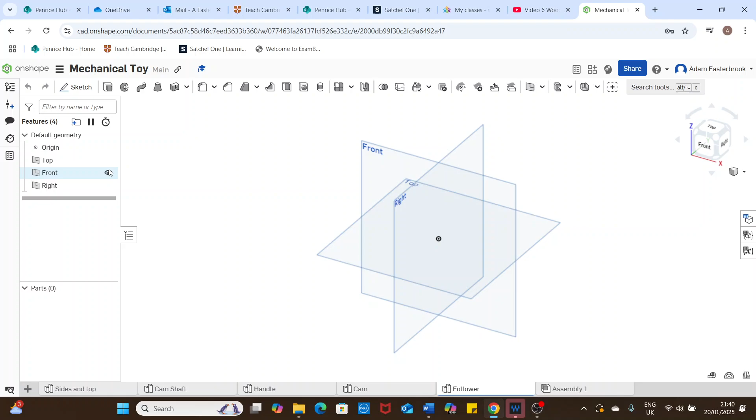Click off the tab. Okay, this is going to take seconds to do, it's not a difficult thing to do. So again, I'm going to hide the top plane, hide the front plane. We want to sketch on the right plane.

So use my viewing cube, click on the right. Sketch, I want to choose the right plane. So from my 3 options, I'm going to left click on right. All my toolbar comes alive, my lines, my circles, shapes, everything.

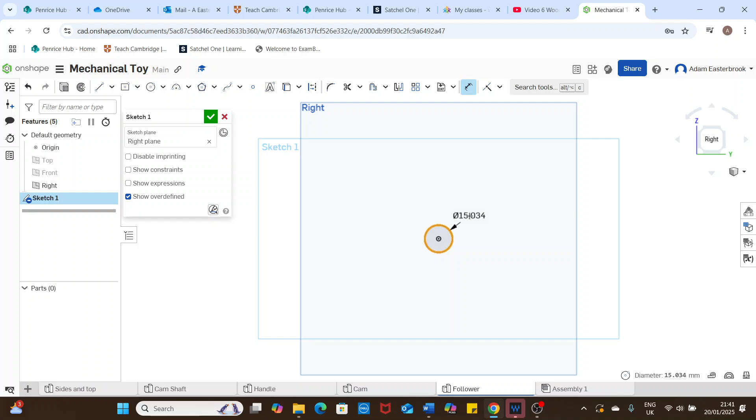I'm going to choose my center point circle. I'm going to snap it to the origin because why not? I'm going to go up and out and we're going to change the diameter of that circle to 6 mil.

That's meter. That's not right, let's see if I can delete that. 6 millimeters. There we go, green tick.

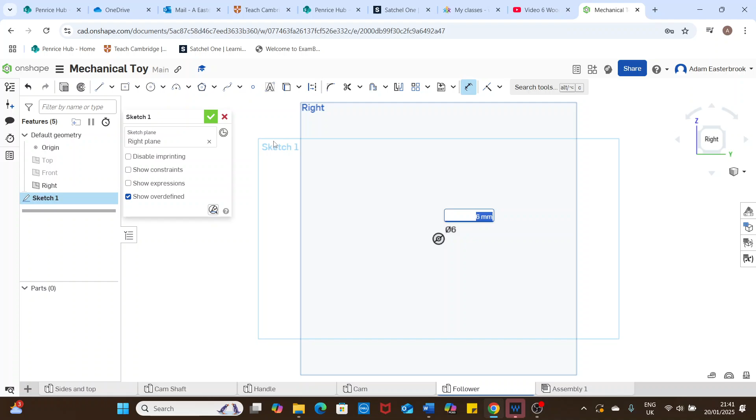Because we set the workspace unit to millimeters, whenever I type in a dimension, so that's I changed it to 10, I don't need to put the units in, I don't need to put the millimeters in because it's defaulting to that.

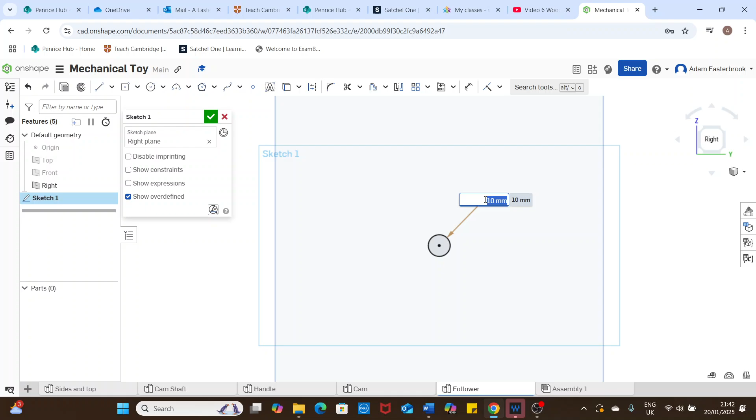That's why it's really important to check those workspace units at the start of any design that you create on Onshape. So let's double click on my 10 and change that back to 6. Don't have to put in millimeters, does it for me.

Okay, yeah, you've guessed it, we need to make that into a 3D shape. So I'm going to right click. You can see I'm hovering so that the circle goes orange around the outside. Be careful you don't click on the center, it's got to be on the actual shape.

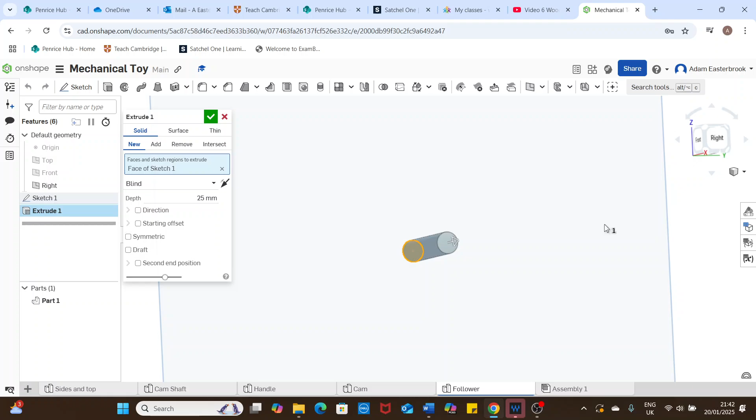Right click, extrude, and this is going to have an extrude depth of, let's go with 150. We can change that later if we need to.

Again, I'm going to choose symmetric, just so half of it extrudes back, half extrudes forwards, and then I'm going to green tick it. And I'm going to change the appearance to make it look a little bit more like

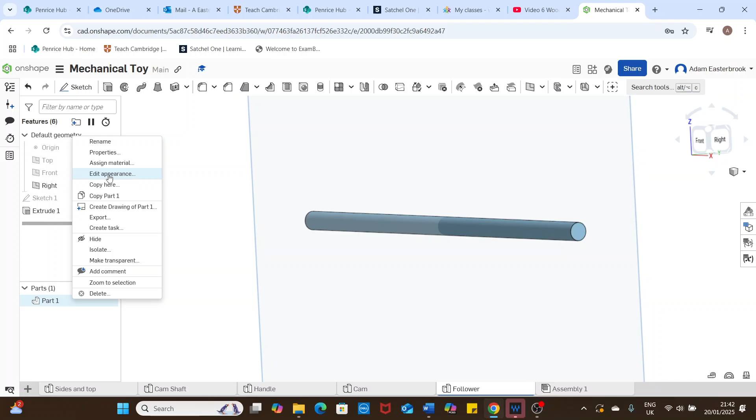a piece of pine wood. So right click on my mouse, edit appearance. Here we go, it's as woody as I will get it to look.

Okay, this is, I think, the more difficult part now. So I think we've created all the parts we need. We now need to assemble them.

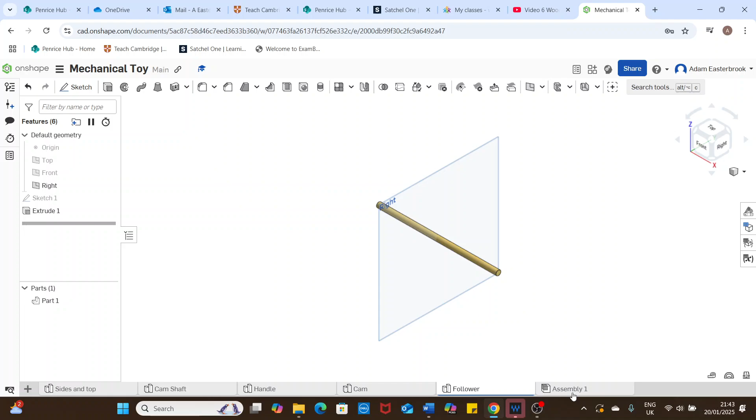So we're going to use the assembly tab. We've used this a couple of times now. It looks similar to our part studio, but the difference is we've got these mating tools all along the top here. We're going to use a few different ones of these for our mechanical toy.

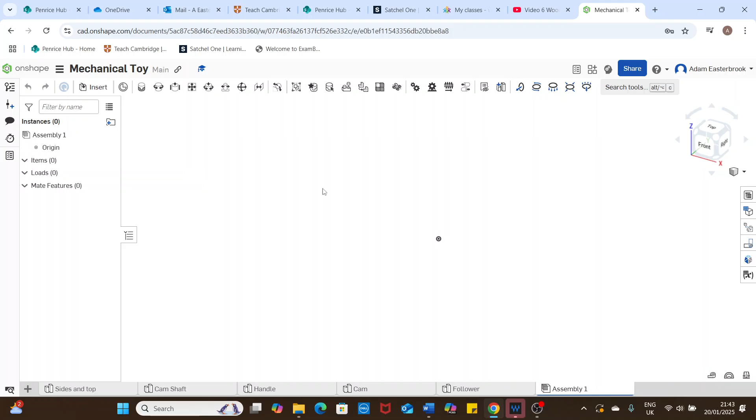So let's get cracking, let's start. So insert, and you can see all the parts that we've now created. Right, all those parts studios are in here for us to choose.

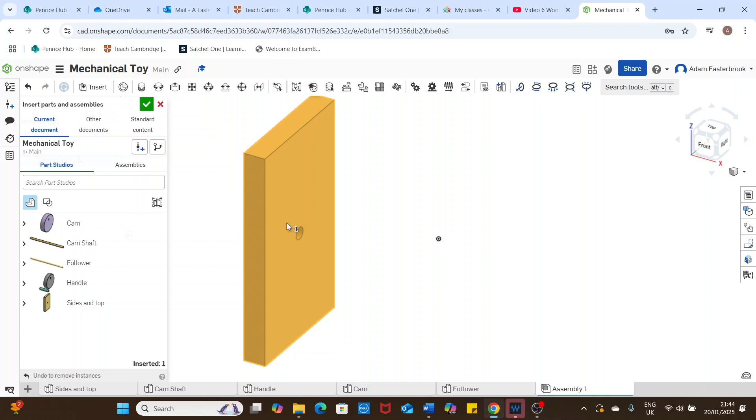So I'm going to insert one side. So I've clicked on the sides and top. I've moved my mouse over and I'm going to click green tick.

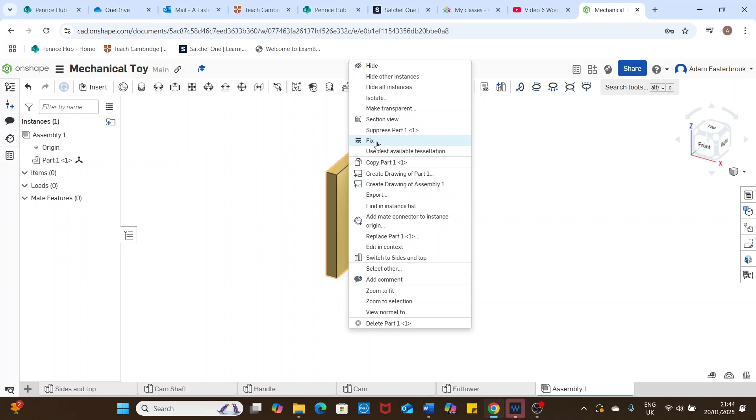What I want to do to help me is fix this in place so it can't move around. The way I'm going to do that is right click, hover over the shape, right click my mouse and choose fix. That's now fixed into place, can't move it around. I'm going to hide the origin just to move it out of the way.

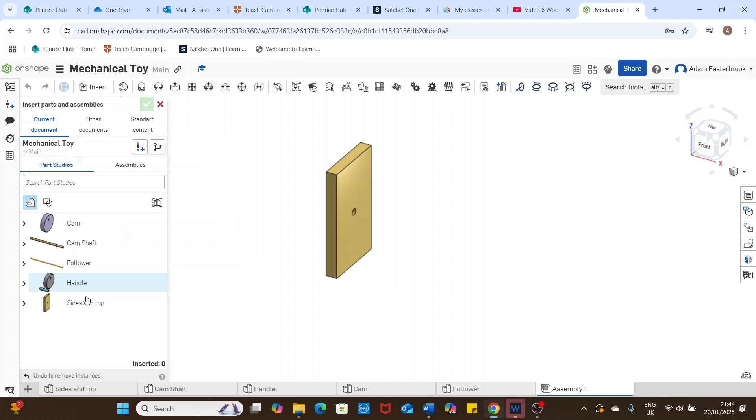Okay, step 2 then. Insert. I need another side piece. Bring it in, click, green tick.

This is going to be the top piece, so I actually need to change the way it's angled. I'm going to do that by clicking with my left mouse button onto the shape, and I'm going to choose this circle with a line.

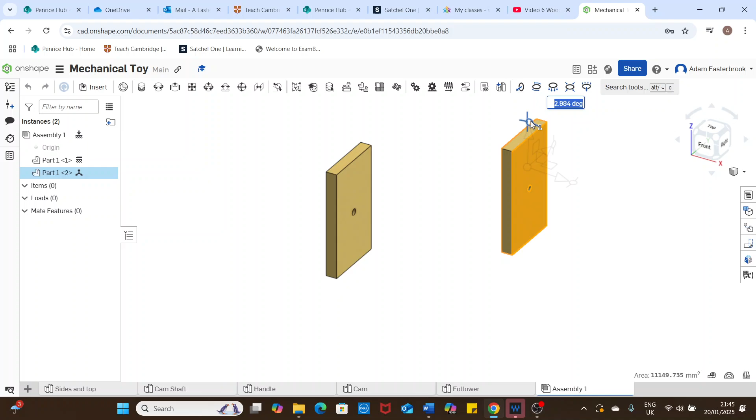I'm going to hold my mouse button down, I'm going to drag it around. You can see that it's changing the angle of it. Now I'm going to let go, and I'm actually going to type in 90 and press enter, and then I'm going to click off.

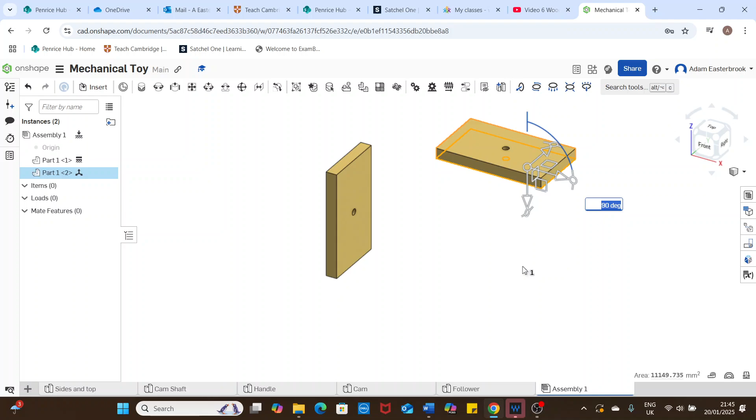So if I go to the front, you'll see what I've done. So I've now created side piece, top piece, back to isometric. Let's bring in my

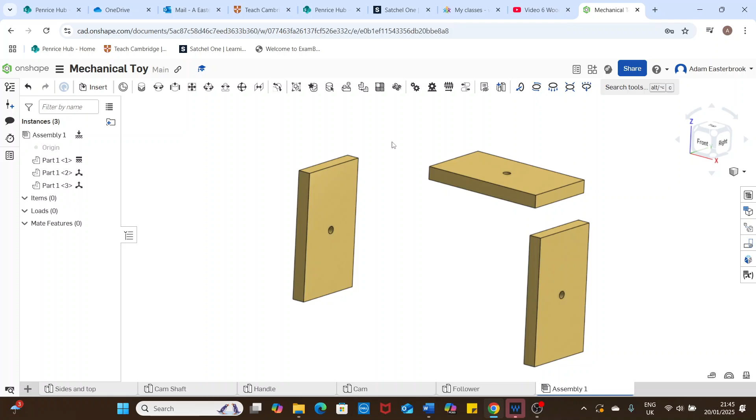second side piece. So bring in my second side piece, click, green tick. This is where I need to use my fasten mate, where I want to fasten the top to the side and the side to the top.

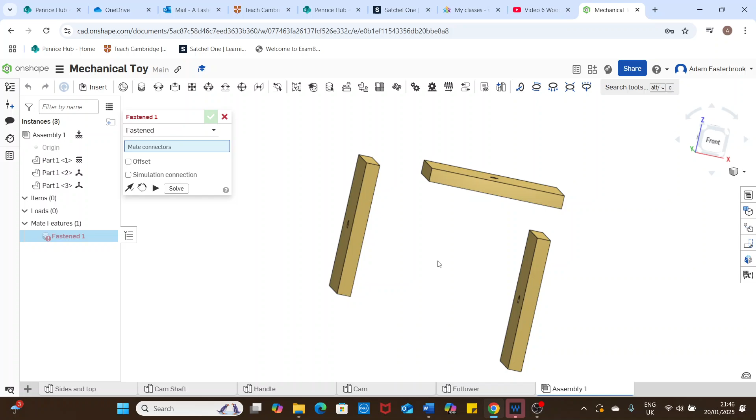Fasten mate is this one here at the top, so I'm going to click. Remember, this can be a little bit, gotta be patient. We always want that blue line pointing away from the material. So what I've done is I've navigated myself, so I'm looking underneath the top.

Imagine I'm going to put a blob of glue there, right on the corner, and I want that corner to line up with the corner here. So you can see what I've done. Blue line needs to be pointing away from the material.

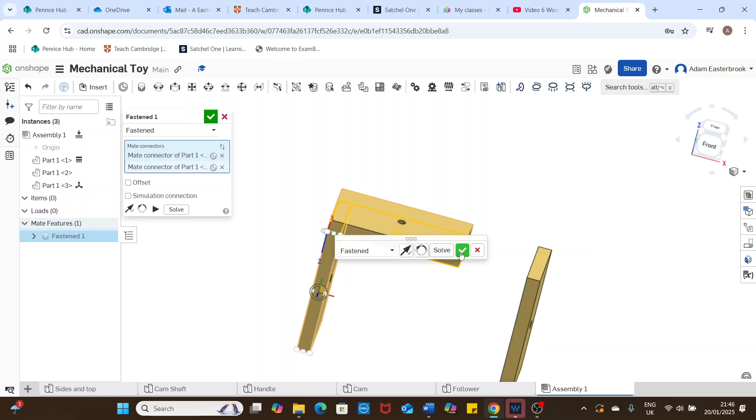Solve, green tick. So there's the top of my mechanical toy. I'm going to do exactly the same over here. So fasten mate.

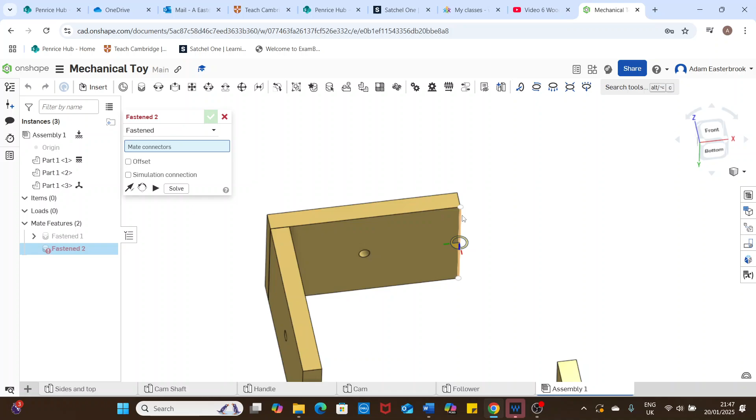Let's go to the underside. That corner, I want the blue line to be pointing away. So you do need to be a little bit patient with this, it can be a bit fiddly. I haven't got it right yet. But that's no. There we are, click. Does take a bit of patience.

Click, solve, green tick. Okay, so isometric - if you're ever lost, go and click isometric. So I've got the basic setup of my mechanical toy. Up to that point, I think I'm quite confident that we can do that quite easily if we think about what we did with our boxes.

Okay, this is where I think it starts to get challenging. So we're going to really have our brains screwed on and our full focus and attention. Let's bring in our camshaft. So insert - here comes the camshaft.

Let's bring it and let's pop it over there. We want this to rotate, and we want it to sit in between these two holes so that it can rotate, it can spin. Those holes have a diameter of 8mm. The camshaft is a 6mm diameter piece of dowel, so it will rotate.

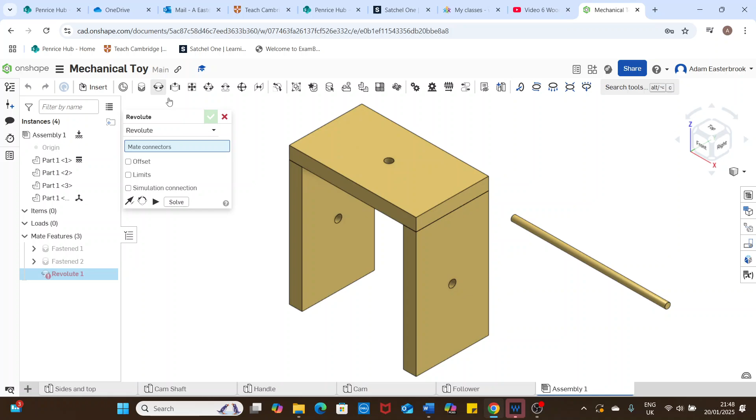We're going to use our revolute mate. Revolute. And we are going to choose that face, and I'm going to put it there. Now you'll notice that it isn't actually all the way across.

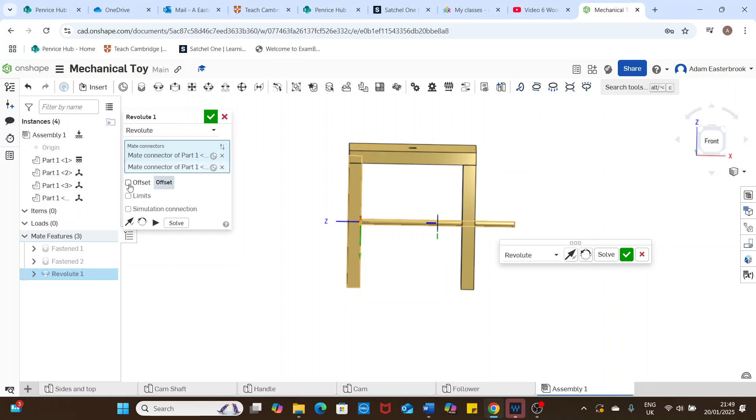So what we've got is a little trick we can do. We can click offset, and I could put in - I'm going to put in 20, tab - and it moves it over slightly. If I wanted to go the other way, I could just toggle with that.

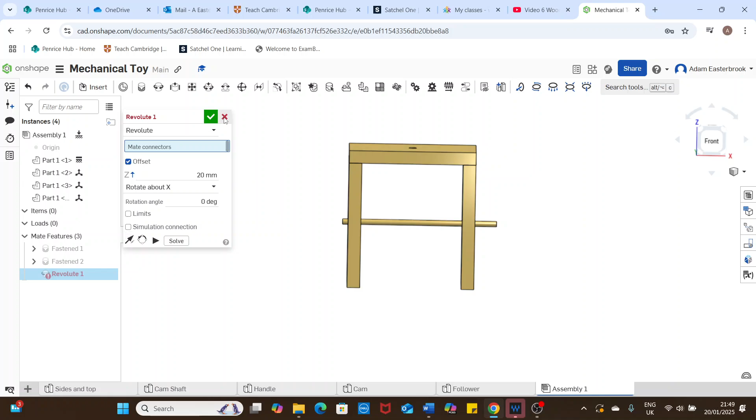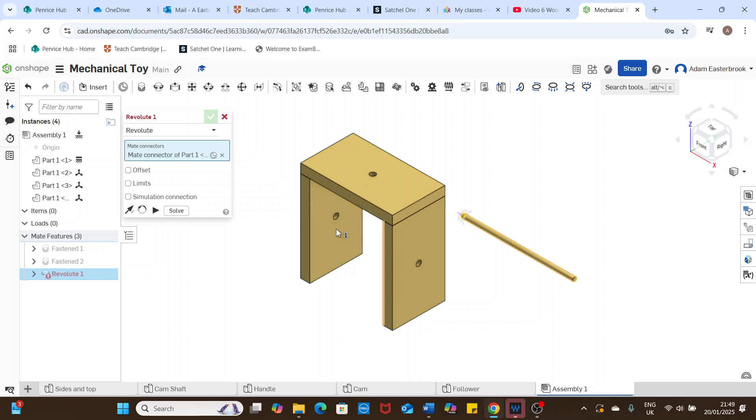Okay, I'll try and do that again. Here we go, revolute mate. Got to choose the face, the end, with the blue line pointing away. Let's go back. Remember, if you ever get a bit lost, click on isometric, and I want it to be in that hole there.

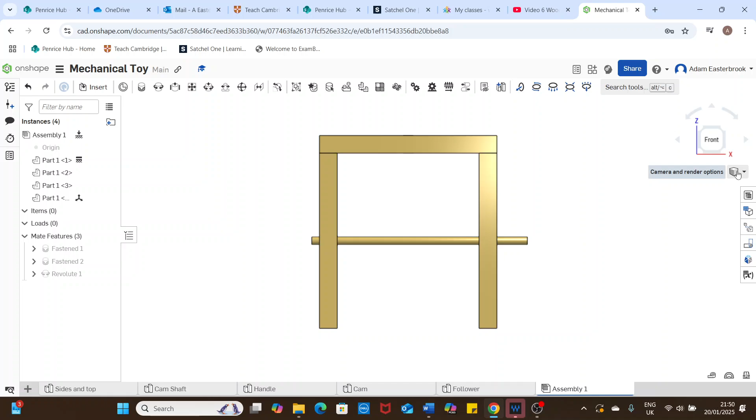It isn't quite over far enough, so we can use the offset, and we'll go with 20 mil. Happy with that, green tick. That's what it should look like. Let's go back to isometric. There we go, got my camshaft set up.

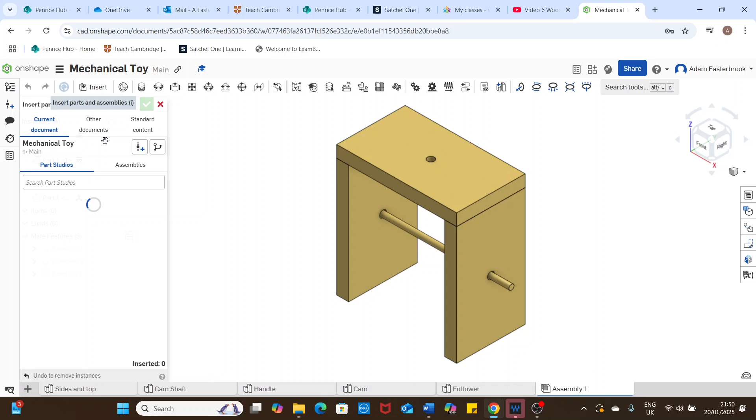I'm going to go and bring in the handle. So we can do the handle, then we'll put the cam on, and then we'll put the follower in, and then we'll almost be done. So insert. We're going to bring our handle in, bring it over and click. Green tick.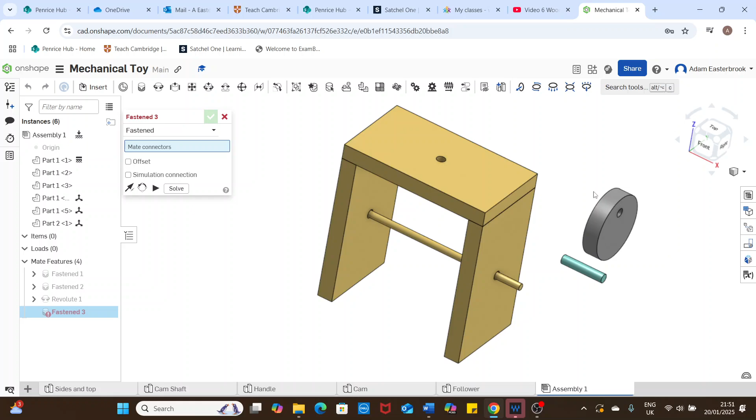We're going to use the revolute mate again. Actually, let's change that - I'm going to, what do I want to fix this one into there. So let's use the fasten mate. To change the view, all I'm doing is holding down the right mouse button so I can get around the back here and have a look.

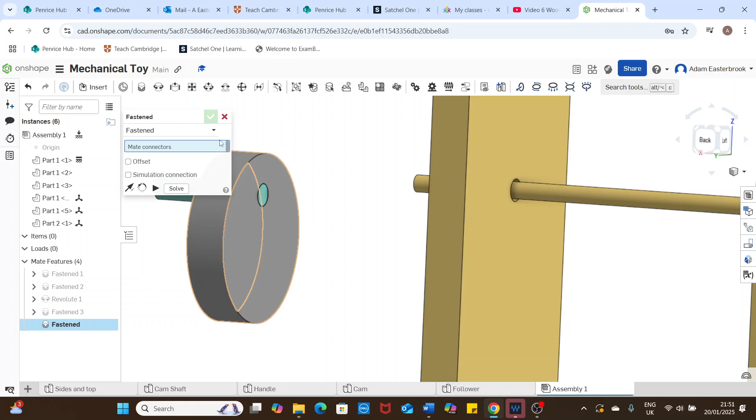I want to have the face there lined up with that green tick. So that's now wedged in - you can imagine I've glued that in there now. So that's in my handle. It gives me something to hold on to turn.

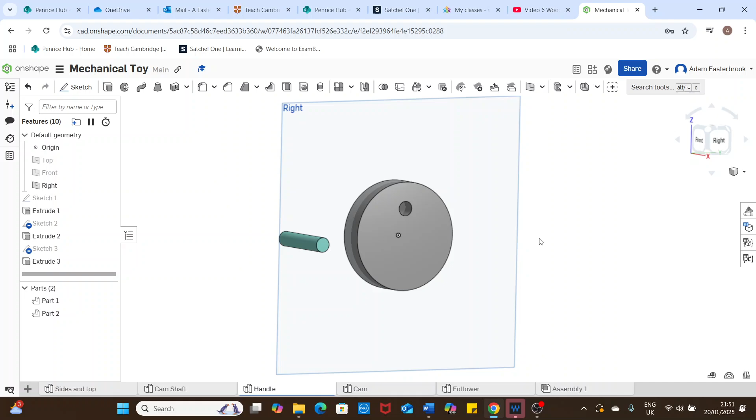I've just noticed this handle doesn't have a hole on it. So we need to go back to our handle and we need to put a hole in the center of it. So let's do that. Sketch, on the face of that object. Center point circle. And that needs to be 6 mil - nice tight fit.

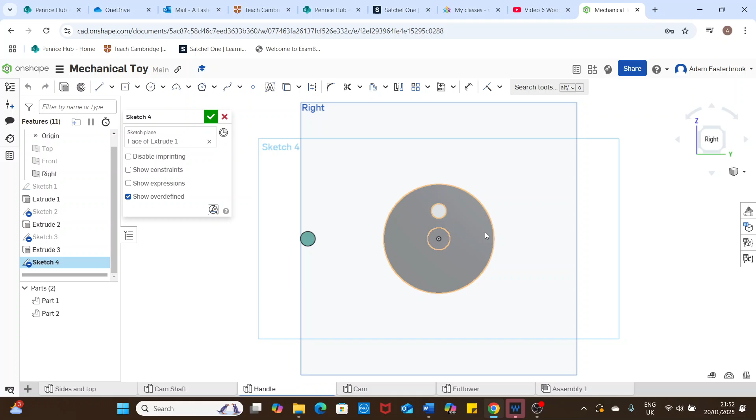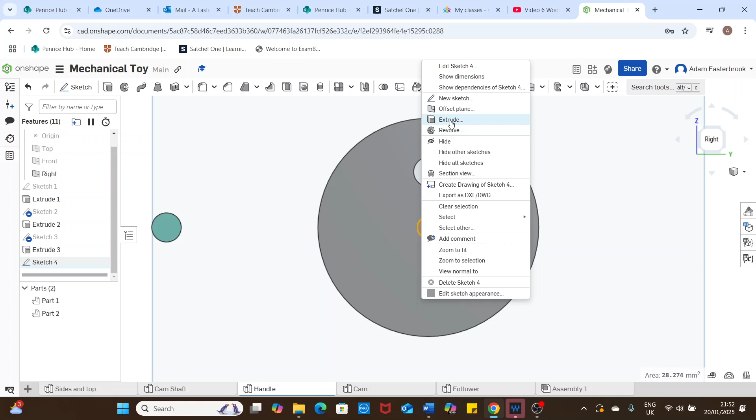That doesn't look right because I thought that was 6 mil. Let's look at that again. Didn't change the diameter to 6 mil. Green tick. Let's hide the origin because it confused me a little bit. Right click. Extrude, remove, green tick. Let's go back to our assembly tab.

There he is, that is there. That 2 minutes of what we just did showcases the beauty of using CAD in the design process. We made a mistake, or we hadn't done something - we go back in and we can make a change and instantly everything else updates. It's so quick, so easy to edit your designs.

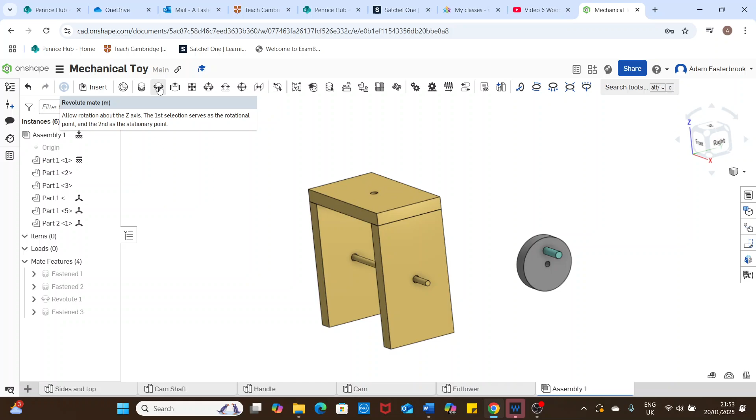Okay, so what we actually want is we want this handle to turn. So we're not going to use the fasten mate, we're going to use the revolute mate. And we want to get that circle there, that hole, and where that blue line is pointing away from the material. And we're going to stick it on the end there. Solve.

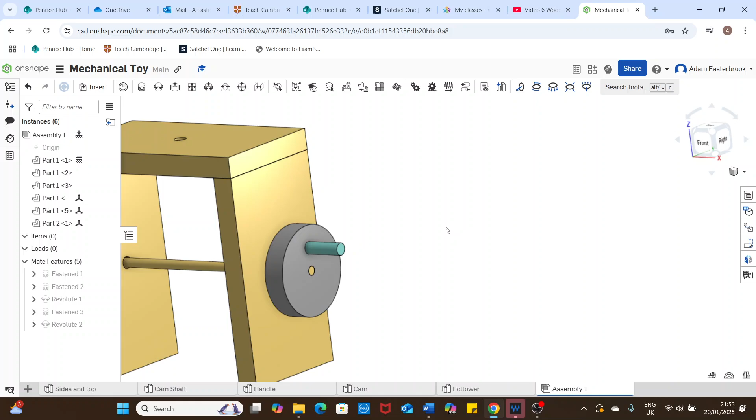There's my handle. Let me see if this works. I should be able to, yep. So what I can actually do is I can left click on that circle there and I can move it with my mouse around.

Or I can do what we've done before. It's a bit laggy - my computer's been a bit laggy at the moment since we're doing some update. I can do the revolute 2, which is the one we've just done. I can right click, I can animate, I can go to loop, change that to 10, press play. So there's our handle.

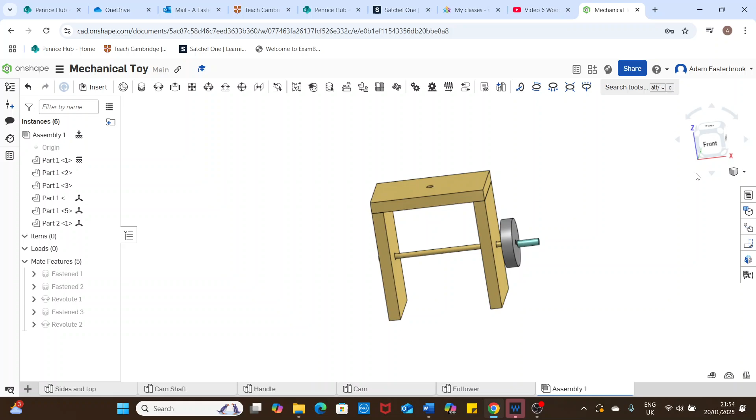Next we're going to bring in the cam, and I will do a separate video for that one.